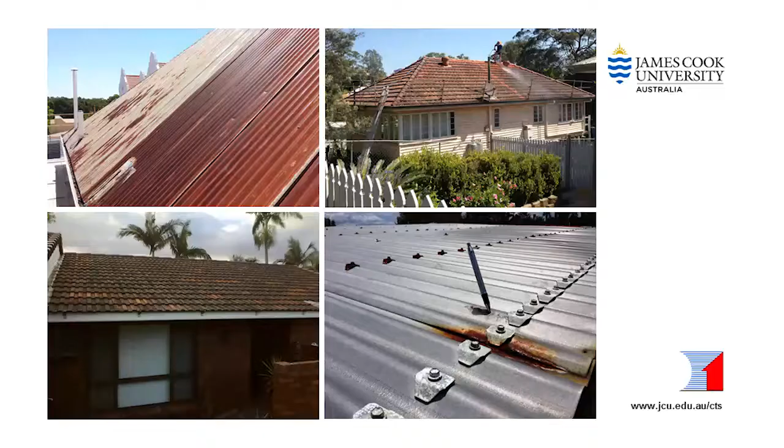The success of a roof in resisting wind forces depends on the strength of the tie-downs in the whole roof, not just the new fixings for the cladding. The only time you can check these tie-downs is when the roof cladding is off. Let's think about the loads that the wind can put on a roof.

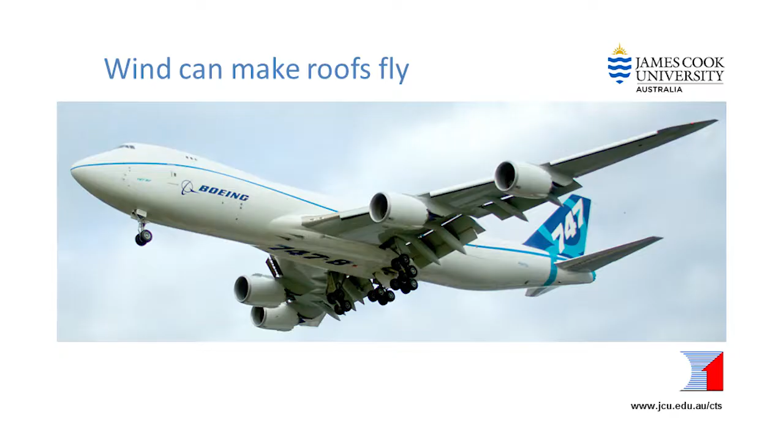This 370-tonne plane flies because of what happens to the airflow over the wings. As the wing rushes through the air like this, some air gets pushed down by the underside. That gives a little bit of lift. But really exciting things happen on the upper surface of the wing.

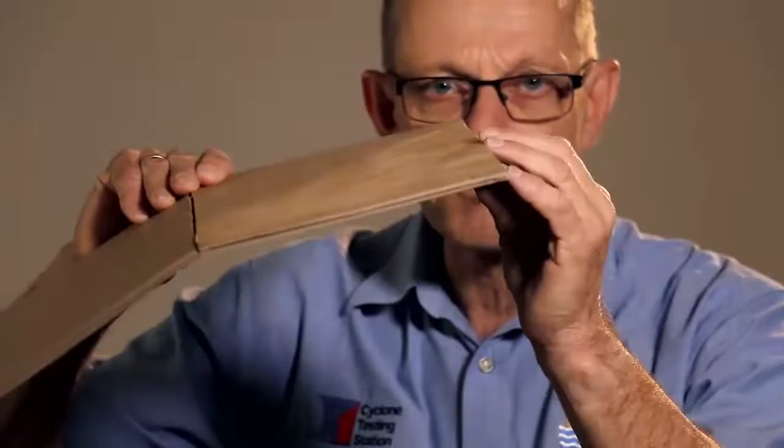As the front of the wing pushes air molecules up and out of the way, the wing moves into the space where they used to be. Now there is nothing on the upper surface of the wing. This nothing is actually suction, which lifts the plane into the air.

Aerodynamically, the same thing happens to a roof that is stationary while the wind is rushing past it. As the wind hits the house and goes up and over the top of the roof, it sucks out air above the roof, and that creates suction on the roof. These suction forces are highest on the edge and near the ridge of the roof, so those are the areas that need the extra anchorage.

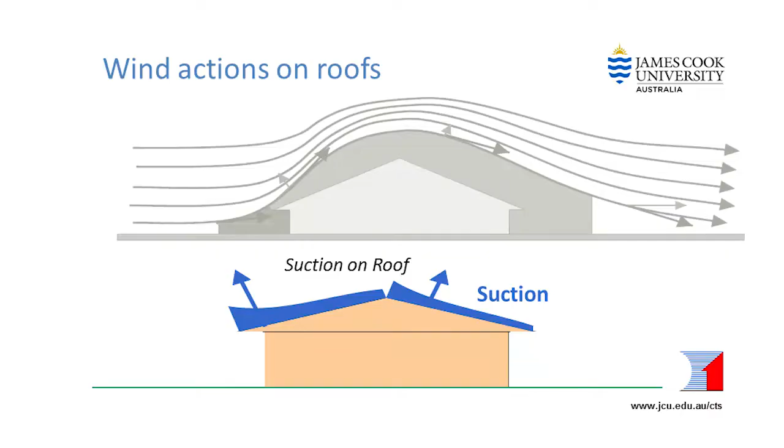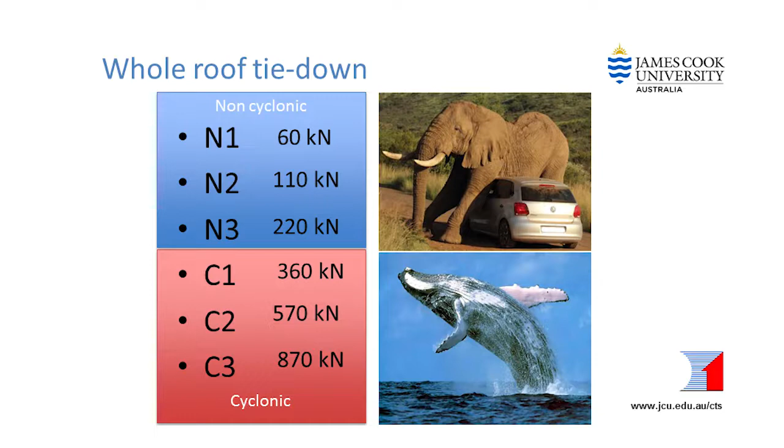Wind can exert several tons of force onto the roof of a house. So if we were only using weight to hold the roof down, we would need to park the equivalent of one or more elephants on the roof in non-cyclonic areas and a whale on the roof in cyclonic areas. Obviously we can't do that, but there are tons underneath the roof and we can tie the roof down using the weight of the whole house.

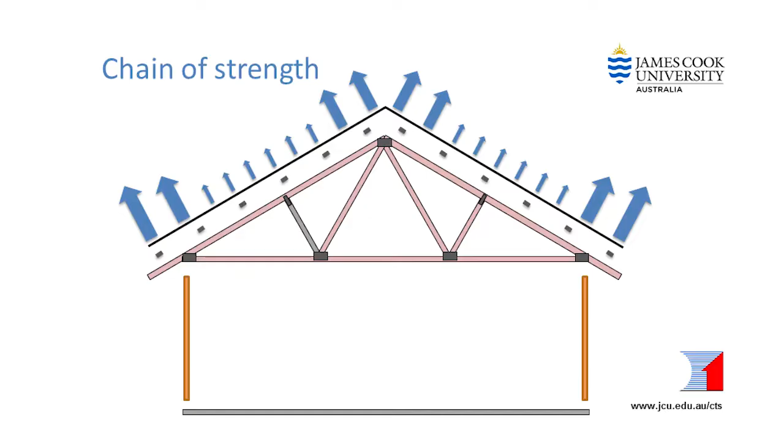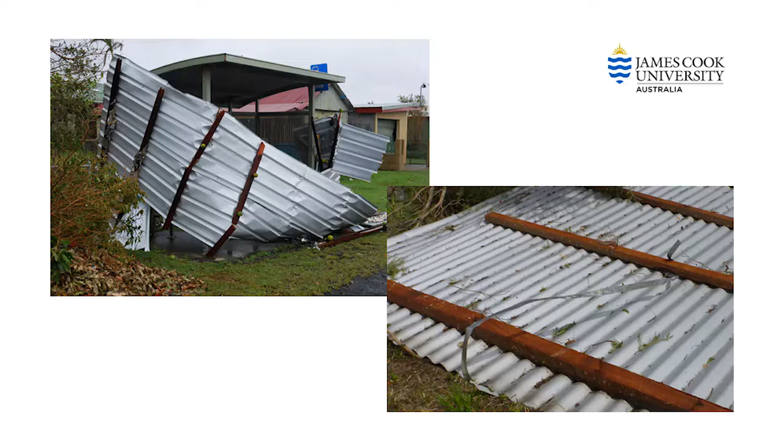But then the battens need to be tied down to the rafters or the trusses, and then the trusses have to be tied down to the walls, and the walls have to be tied down to the floor, and the whole house anchored strongly to the ground. The most important task is to tie the roofing and the whole roof structure to the walls.

While the roofing is off, it is possible to see what is holding down the battens and the rafters or trusses. And if the existing connections aren't good enough, they can be replaced at that time. In order to determine the tie-down required, you need to check the site wind classification for the building, which gives an indication of how fast the wind is going to be hitting that particular site in a design wind event.

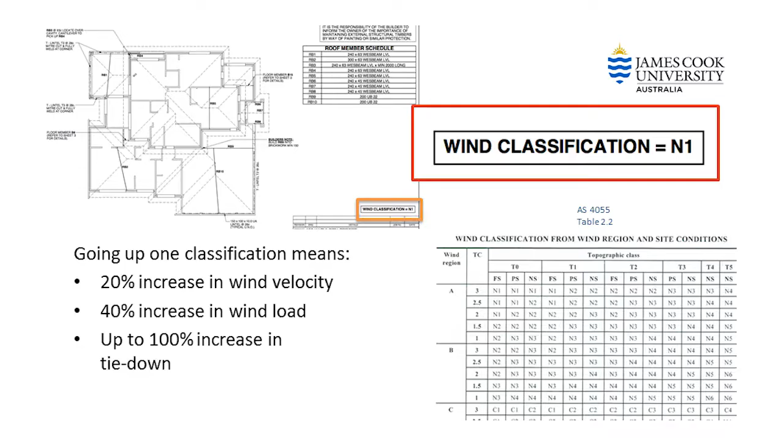In some cases, the owner may know the site wind classification from the plans. But if not, you can use the standard AS4055 Wind Loads on Housing to determine the classification. It's particularly important to get this right, because if the tie-downs are sized using a classification that is too low, then they will be severely overstressed. So if there's any doubt at all about the correct site classification, it's always wise to use the higher classification.

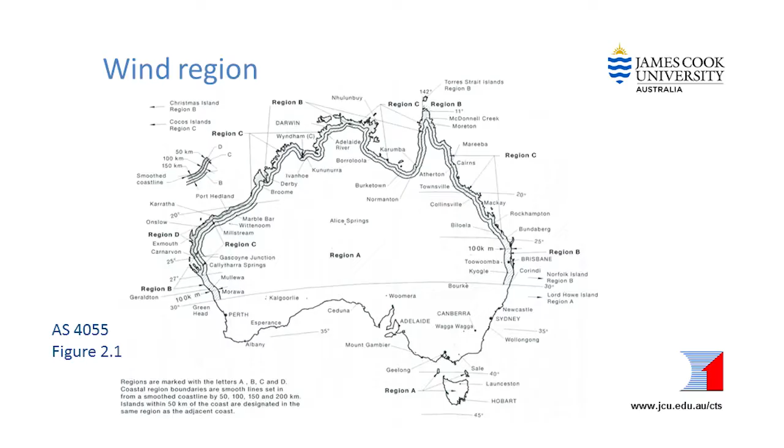The first step in working out the wind classification is to use figure 2.1 in AS4055, which tells you which region the site is in. For example, Brisbane is in wind region B. The next step is to look at the terrain within 500 metres of the site. Google Earth is ideal for doing this. The most open terrain within the circle is the value you use.

For this example, the site is surrounded by suburban lots and all of the land in the circle is terrain category 3. Next, check whether the house has any shielding. Two rows of houses on all sides are required for full shielding.

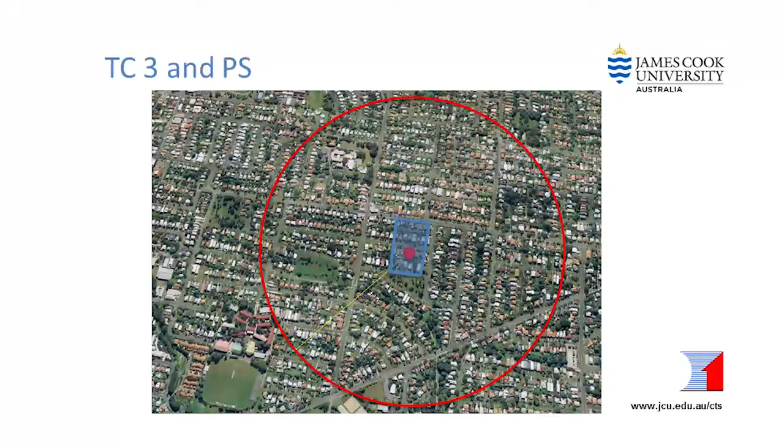In this example, there's only 1 row of houses providing shielding on the south side, so it's classified as partially shielded. Finally, the topography has to be checked, and often a site visit is necessary. In this example, the house is on flat land, so the topography classification is T0.

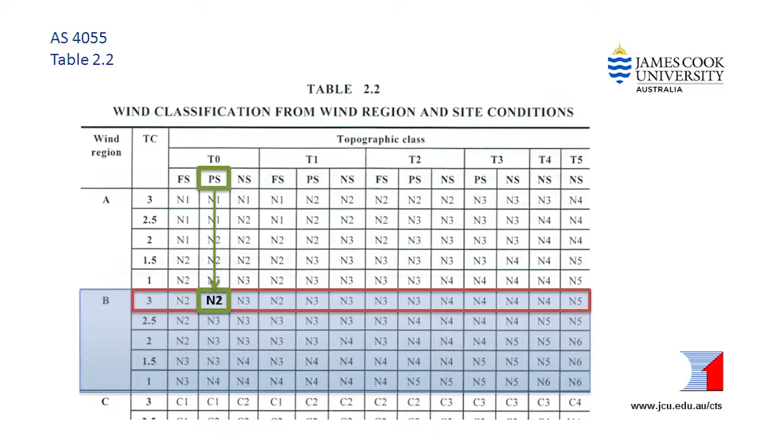All these classifications are used together in Table 2.2 in AS4055 to provide the appropriate wind classification for a particular site. However, as a general rule of thumb, if a house has good views, it's going to have a higher wind classification. The Region B house in this picture would be considered N3 on flat land, but because it's built at the top of a steep hill, it's actually N5.

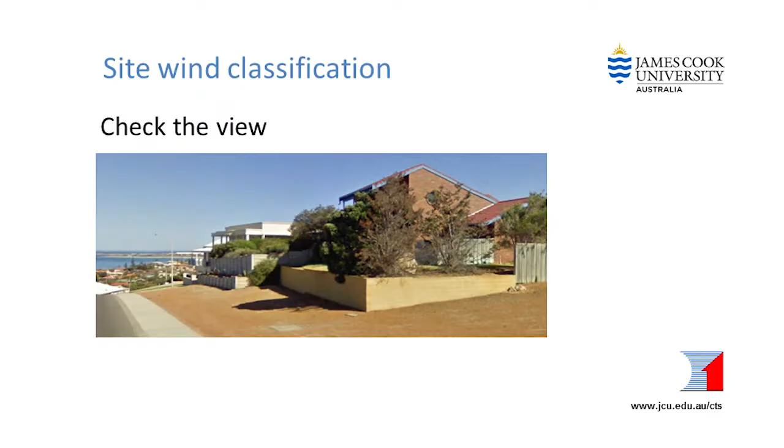So while you're quoting on the re-roofing job, check the view from the roof. If you have a really good view, you know you are going to have to use substantial tie-downs to ensure that the roof is properly secured, which may affect the price of the job.

Different site wind classifications require different tie-down connections. Also, the highly loaded areas around the edges and ridges require stronger tie-downs than the general areas of the roof. For housing, the outside 1200 millimetres of each panel is considered to be an edge region. This takes in at least 2 battens at the eaves and the ridge.

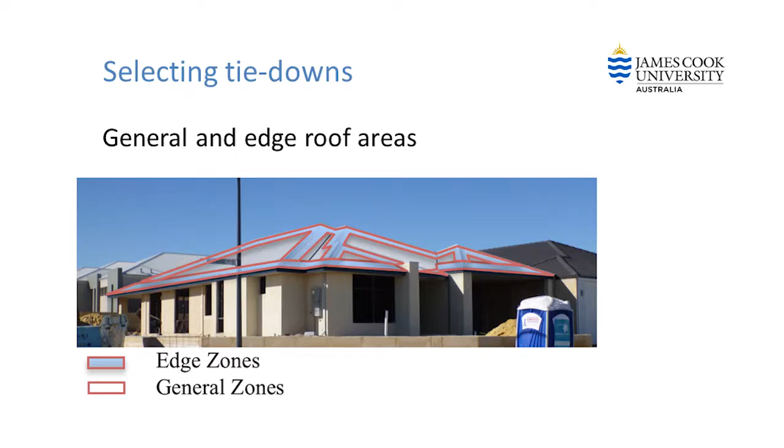You can determine what tie-downs are needed from a number of different sources. The roofing manufacturer will tell you the anchorages you need to connect the roofing itself to the battens. Batten manufacturers often specify the connections required for their products to tie them to trusses, and truss manufacturers should give details for tying down the trusses.

If these details are not available from the manufacturers, you can use AS 1684 for timber and the NASH standard for steel to match the site wind classification to the loads required. Other tables in the same documents give you the tie-downs needed.

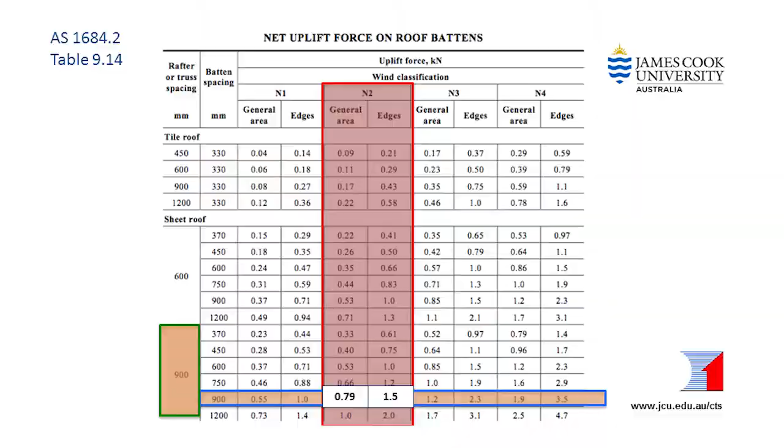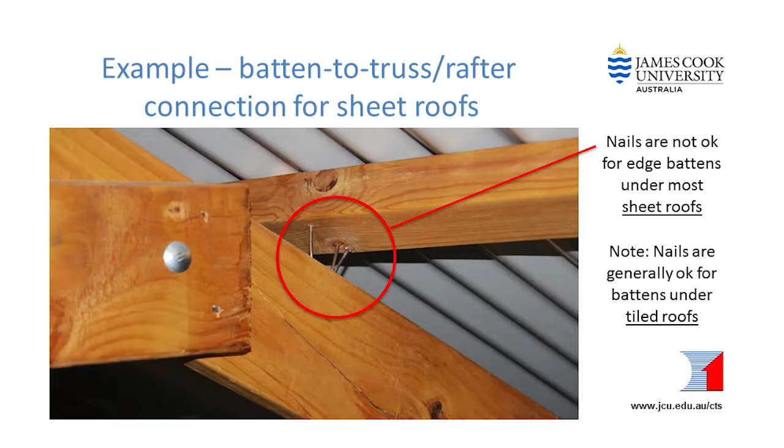We have learned from damage investigations that nails on their own don't have enough strength to hold down edge and ridge battens against wind loads in almost any part of Australia. So if you see battens fastened with nails, some extra fixings will be required. Many older roofs have hardwood battens or trusses, so to prevent splitting, it may be a good investment of time to pre-drill seasoned hardwoods before driving any screws in.

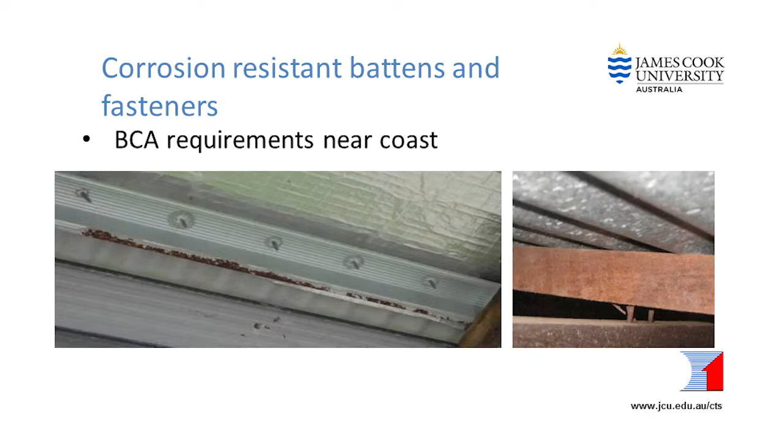Also, in coastal areas, the BCA has special requirements for corrosion resistance for all structural elements, including battens and fasteners where they're exposed to the sea air. The client may ask you to change the type of roofing material. For example, sheet roof replaced with tiles or vice versa. Most states and territories require building approval for any change of roofing material.

If changing from a light to a heavier material, the ability of the structure to support the increased weight will need to be assessed. However, if changing from a heavy to a lighter material, review all materials and tie-downs to ensure that they can resist the wind uplift.

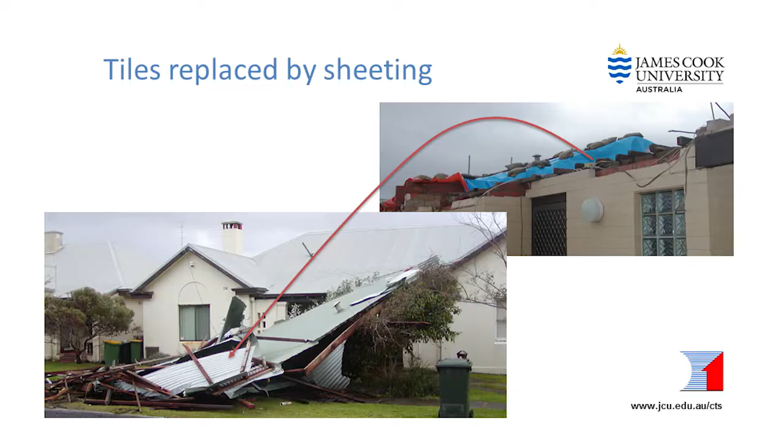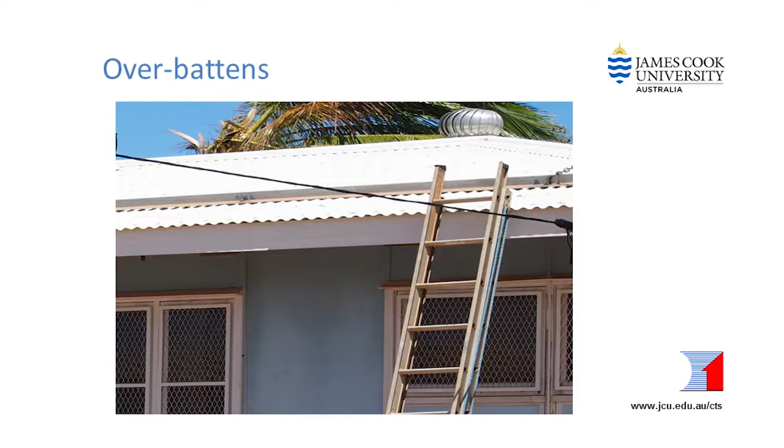There may also be local variations in construction practices that will have to be considered as part of the tie-down process. For example, in some cyclone regions in northern WA and some parts of northern Queensland, there may be overbattens on top of the roof sheeting. These have been designed as the main anchorage to tie the roof firmly down to the bottom of the structure.

If the overbattens are removed, something else needs to be put in their place that does that job just as effectively. Most of the connections in the roof may also have to be replaced. It is recommended that a full engineering review is conducted if the overbattens are removed.

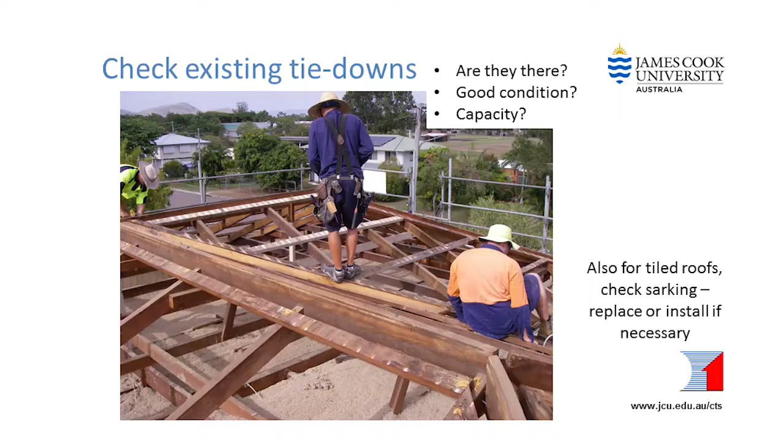In most cases, you won't be able to check the adequacy of the structural connections until you get all of the roofing off. So when quoting for the work, it is wise to discuss with the client up front that in addition to the costs for the new cladding, while doing the work, you may find that there are extra costs for structural upgrading.

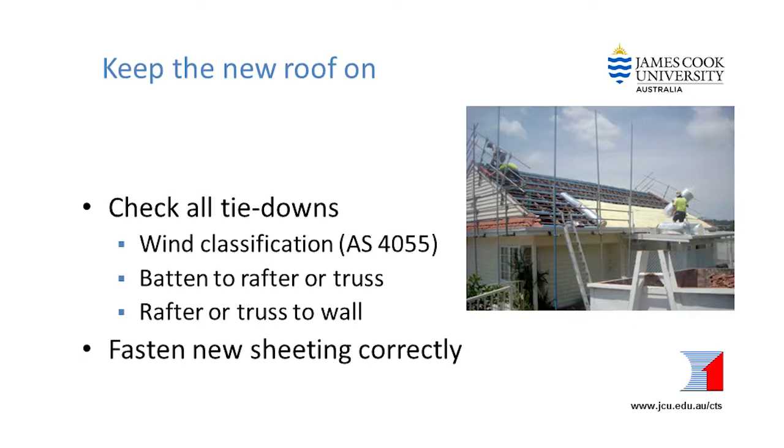As a building professional, you will want to do the best job possible for your clients, and your duty of care is to provide safety and amenity. When all roof connections are checked and upgraded if necessary, you can be confident that the new roof will not only look good, but perform well in strong winds.